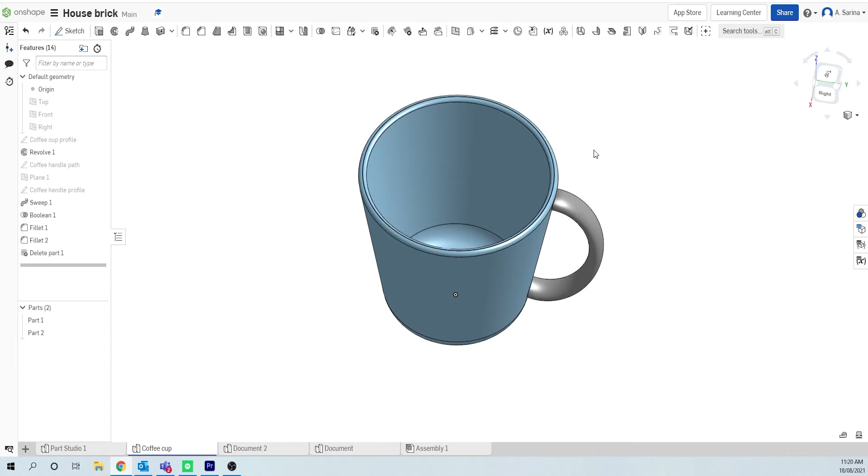The second way is the revolve tool, which is what we use for the main body of this coffee cup, or the liquid reservoir part, where we drew a profile and then revolved it around an axis to create the shape. And then the third way is the sweep tool, which is where we drew a profile and a path for that profile to follow, and that's how we created the handle of our coffee cup.

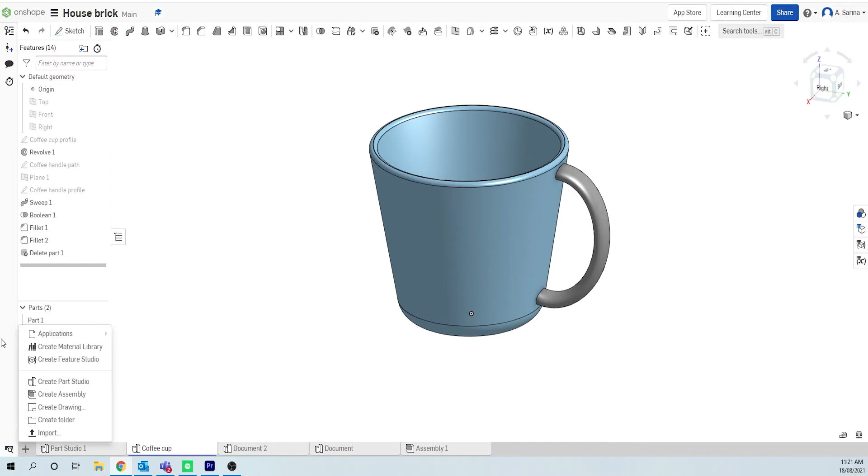So in this tutorial, I'm going to show you one more way that we can use to create 3D objects, and that's called loft. So what I want you to do is to create a new part studio, and again, to do that you just click the plus down in the bottom left corner and go create part studio. And for this one we're going to be creating a drink bottle, so you can rename it drink bottle and then click enter.

Now the loft tool works by creating a series of 2D sketches and then joining them together. So we need to create some extra planes other than the 3 starting ones, so that we can draw our profiles and then loft them together. So I'm going to select the top plane, and then I'm going to select the plane tool in the ribbon at the top here.

When I select the plane tool, it basically creates a plane offset a certain distance parallel to the plane that I've selected. So in this case we're going to offset it 40 millimeters and then click the tick, and you'll see it's created a new plane. And I'm going to repeat this a couple of times. So I'm clicking the top plane again, then the plane button. This time I'm going to offset this one 200 millimeters. And you'll see there's another plane created at the top here.

Now, there is another movement function which I haven't showed you guys yet in OnShape. If you click the mouse wheel and hold it, you can pan around the workspace. So remember, scroll wheel zooms in and out. The right click and hold lets you rotate around in 3-dimensional space, and then clicking in the mouse wheel and moving lets you pan.

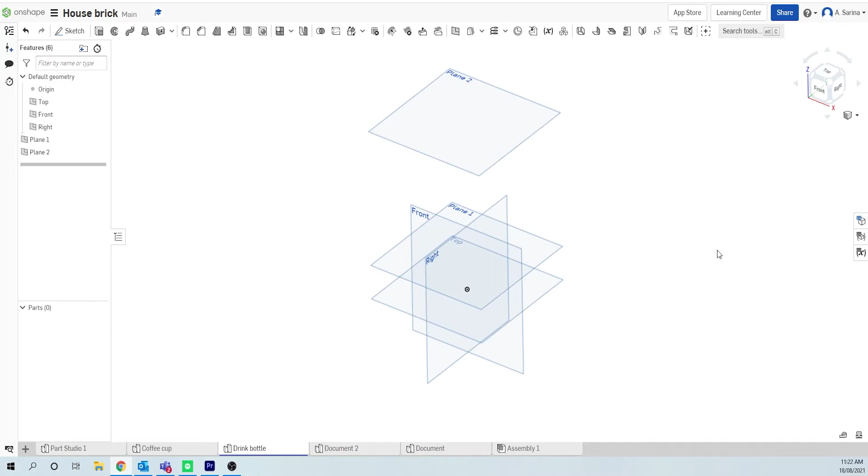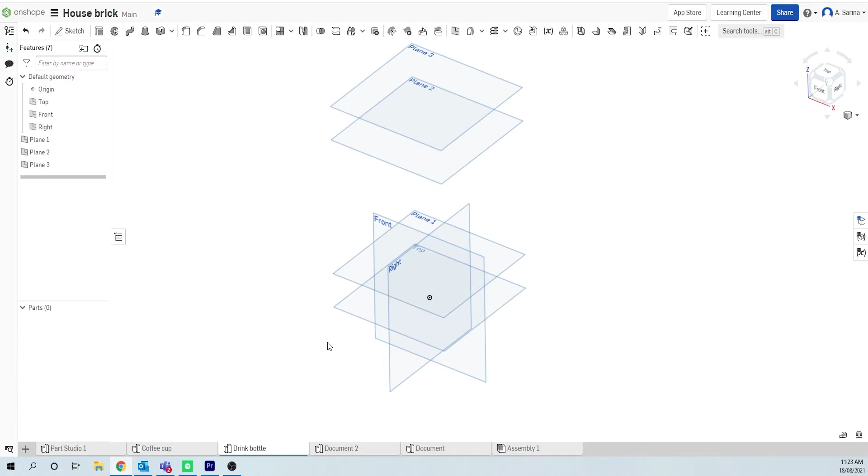Okay, we need to create one more plane, so I'm going to select the top plane again, and then I'm going to click the plane tool again, and this one we're going to offset 240 millimeters and click the tick. Alright, so what we're going to do is we're going to create a hexagonal drink bottle that's lofted together. And to do that we're going to start on this top plane, click N to normalize, and then create a new sketch as we have been.

This time, instead of doing rectangle or circle, we're going to use the polygon tool. So I'm going to start my polygon on the origin point, drag my cursor out horizontally, making sure that my line is dotted yellow, and then I'm going to click. Once I click, it's going to let me change how many sides my polygon has. So if I move it to the left, I get 3, and if I go to the right, it increases the amount of sides. We're going for a hexagon, so we're going to go with 6 sides and then click.

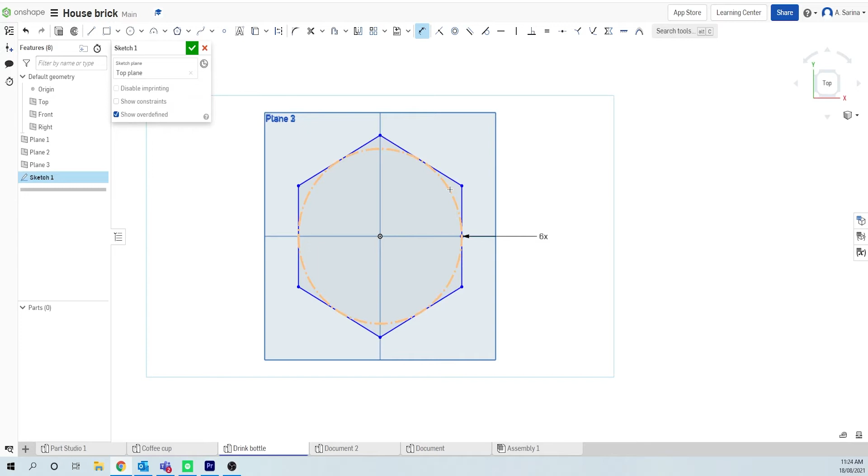If you have got the wrong amount of sides at the end, you can just double click on this and change it to however many sides you want. The next thing we need to do is dimension our hexagon. So to do that, you can either click the dimension tool here or press D on your keyboard. Click on the inner circle of the polygon and drag out the dimension. In this case, we're going to make our hexagon an 80 millimeter hexagon, and then we're going to finish that sketch. We're not going to worry too much about naming sketches in this instance because we're going to loft them all together anyway.

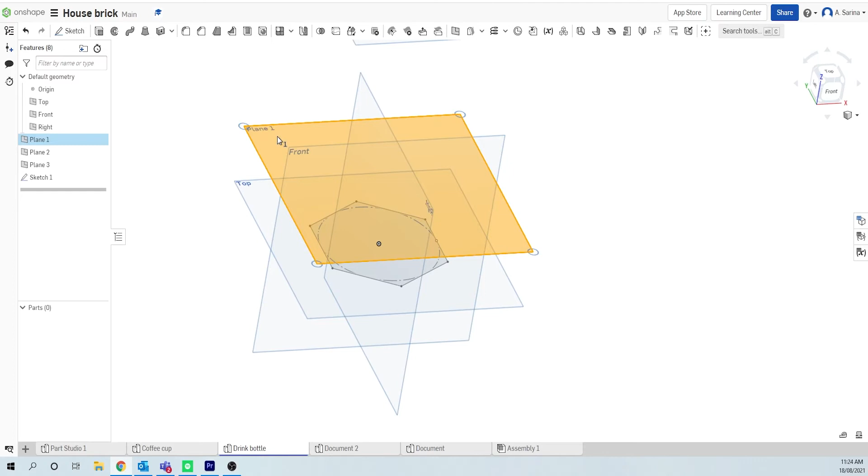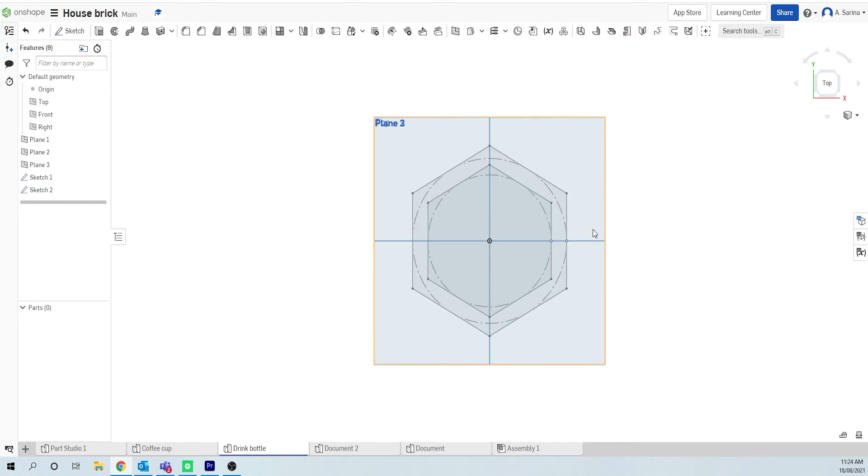Alright, moving back into the 3D space, I'm going to select the next plane, N to normalize, and start a new sketch. And again, I'm going to create another hexagon. This one I'm going to make slightly larger, so I'll drag it out horizontally again, click, make sure we've got 6 sides, then select the dimension tool and change the dimension of our hexagon to 100 millimeters and finish the sketch. And we're going to repeat this process again. So I'm going to go to the next plane, N to normalize, and then sketch.

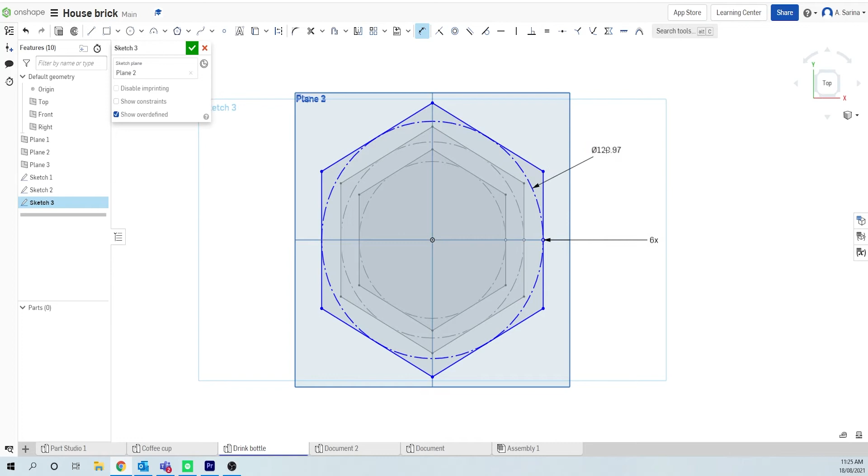I'm going to create a hexagon again, so clicking on the origin point, and this one's going to be the same size as the last one, so I'll drag it out, click again to make sure there's 6 sides, dimension tool, drag the dimension tool out, and then change that to 100.

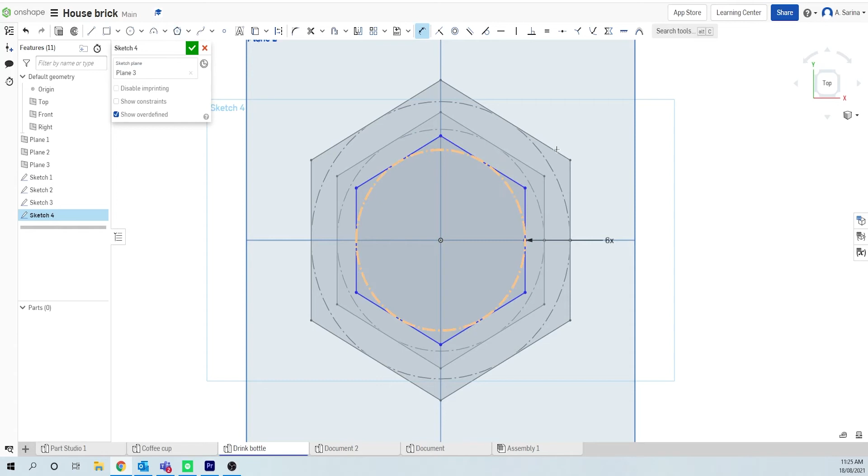And then the last one we're going to do is on the top plane that we created, plane 3, N to normalize, and this one is going to be another hexagon that's the same size as your original one. So start on the origin point, drag out horizontally 6 sides, and dimension it to be 80 millimeters. Great, now we've got everything we need to do a loft.

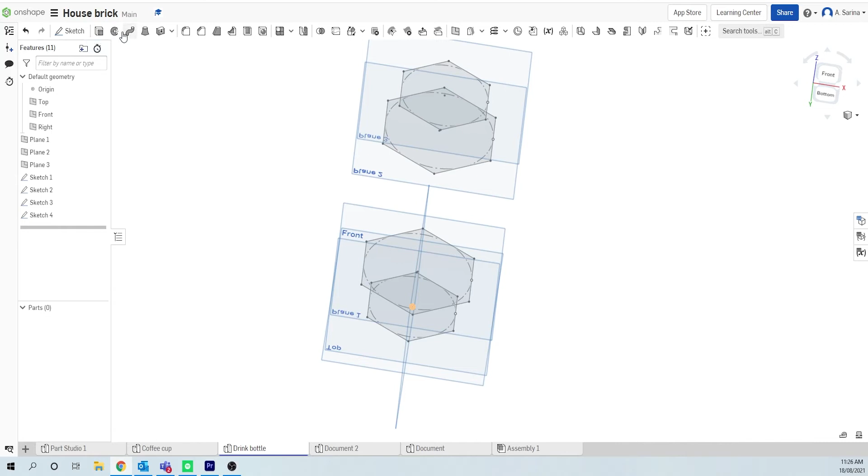So what I'm going to do is rotate back around into 3-dimensional space so I can see what I'm doing a little bit better. And with larger objects like this is when that pan tool really comes in useful, because you can zoom out and then use the mouse wheel click and hold to move the object into a more favorable position. Now with the loft, we're going to go up here to our 3D tools. So we've got extrude, revolve, sweep, and loft.

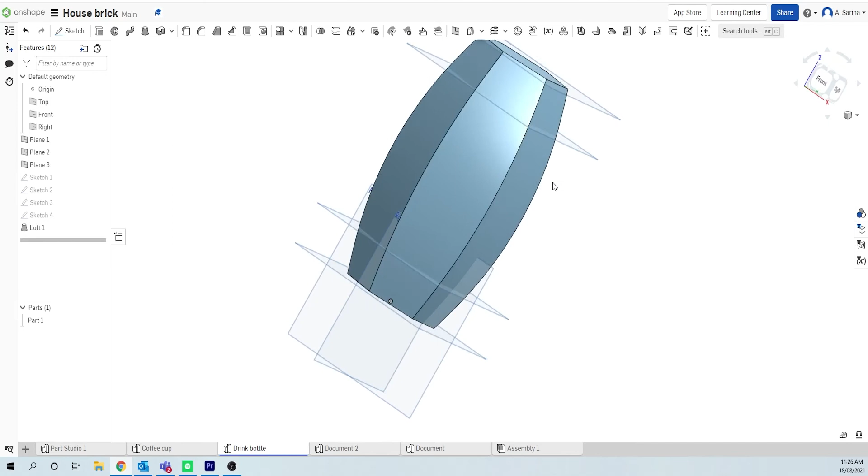With loft, basically we want to select the profiles in the order that we want to join them. So I'm going to start at the bottom, click the first profile, then the next one, then this one, and then this one, and then that's it. We're just going to click tick, and it's going to create our 3D object for us. And you can see what it does is it basically joins those profiles and blends them all together so that we have a nice shape. And this is going to form basically the bottom of our water bottle, or the water reservoir part of it.

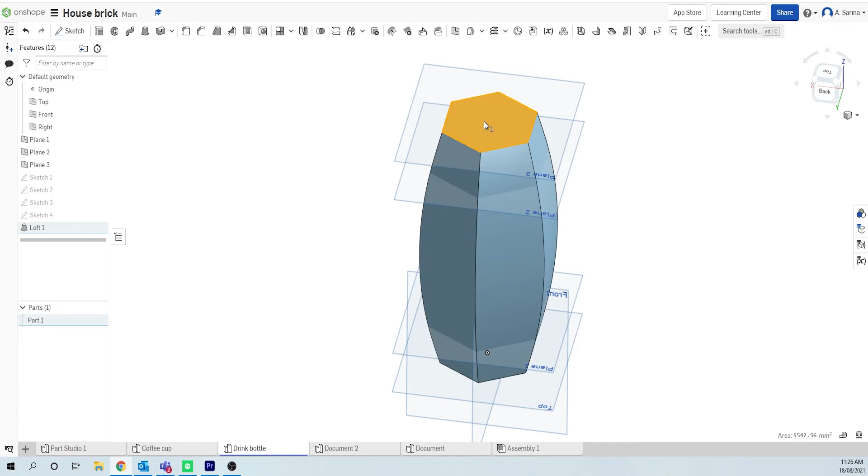Okay, the next thing we're going to do is we're going to create a circular top on our water bottle for a lid, and also the place that we're going to drink out of, and then we'll hollow the water bottle out. So we're going to click on this top face of the water bottle, press N to normalize it, and then we're going to draw a new sketch. We're going to use the circle tool, starting from the origin point, drag your circle out, and we're going to create a 70 millimeter circle.

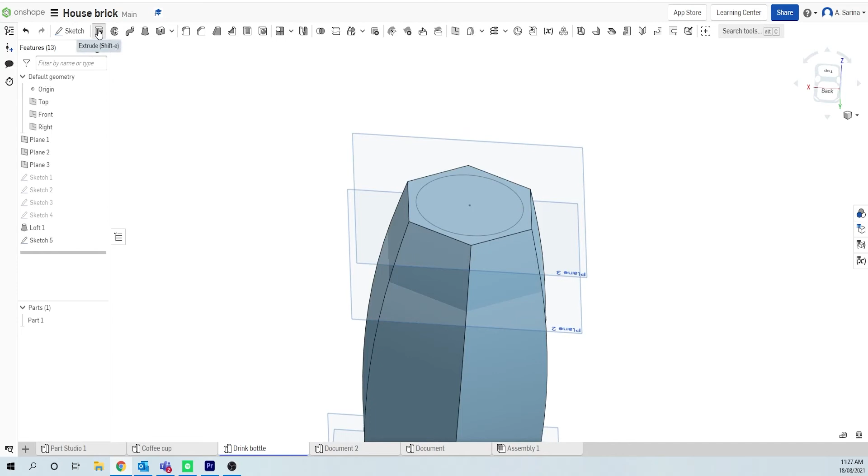Press enter. I'll finish that sketch, rotate into 3 dimensions. I'm going to go back up to the extrude tool, and then I'm going to extrude that circle out. In this case, I'm going to extrude at 20 millimeters. Make sure we're adding, so that means we're adding material to the base, and this will stay as one part. And then we're going to click the tick.

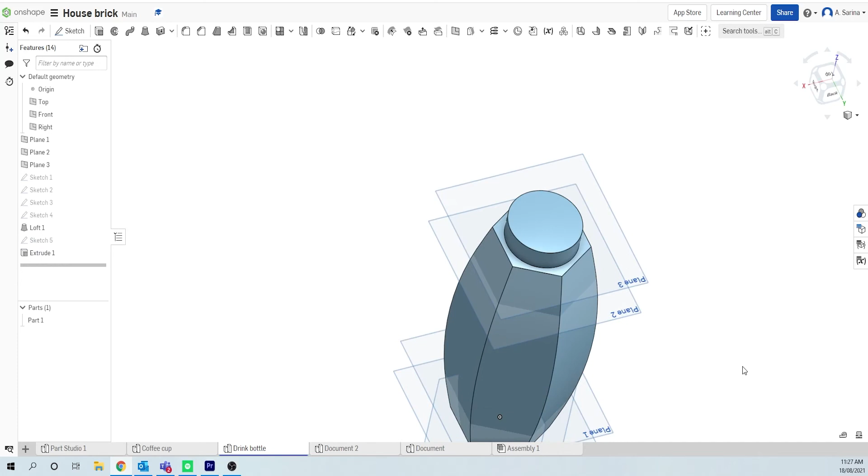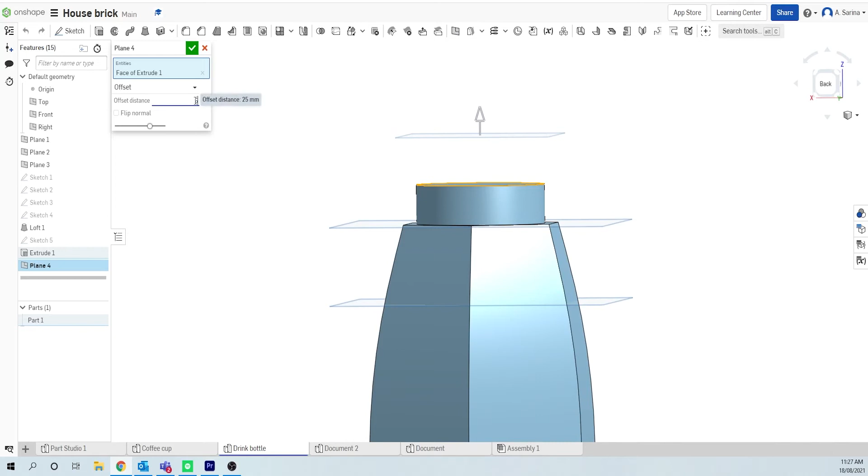Okay, and that's basically our water bottle created. The only thing we're going to do is hollow that out, and we'll do that in a minute. What we're going to do before we hollow it out is create a lid for it. And so to do that, I'm going to create one more plane. I'm going to click on this top surface here, and then click our plane tool, and we're going to create a plane above that surface 5 millimeters. So I'm going to type 5 in here, and then click tick.

Again, I'm just going to highlight, if you make a mistake on any of these steps and you need to go back and change it, say for example that plane you just created was too high, you can just double click on it in the feature tree. It brings the dialog box back up, and you can change it, and then click the tick again.

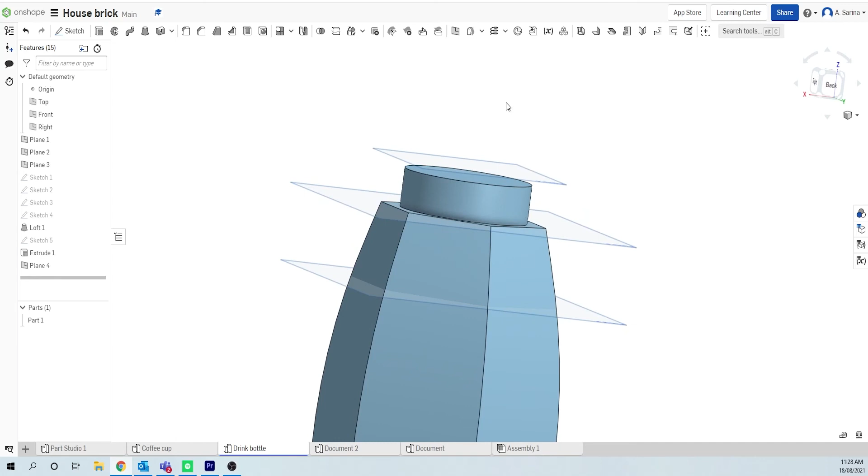Alright, so to create the lid, we're going to click on this Plane 4, press N to normalize it, and then we're going to click sketch to start a sketch. This time we're going to draw another circle. So starting in the origin point, drawing your circle out, and our circle is going to be 76 millimeters in diameter, which will mean that it's a 3 millimeter thick lid all the way around.

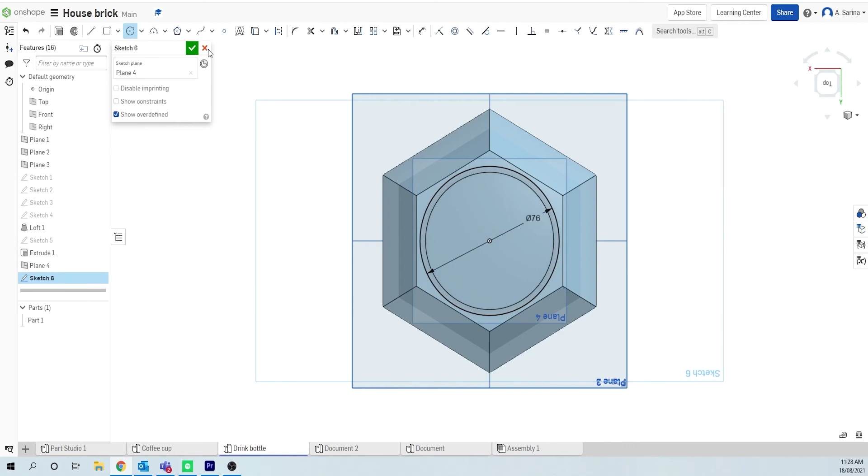We're going to finish that sketch, and then we're going to go to extrude at the top here, click our circle. Now we want to make sure we've got new, because we're going to create a new part. We want the bottle and the lid to be separate. At the moment you can see that it's extruding up. We don't want that because we want the lid to marry up to the top of our water bottle. So we need to change the direction.

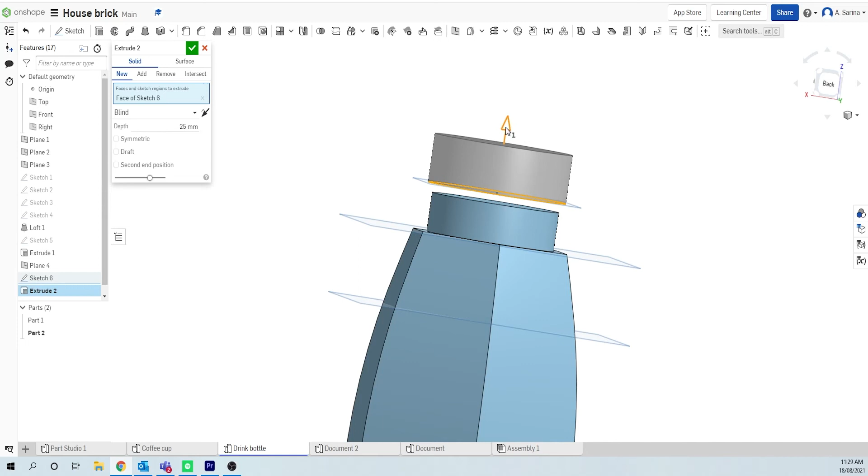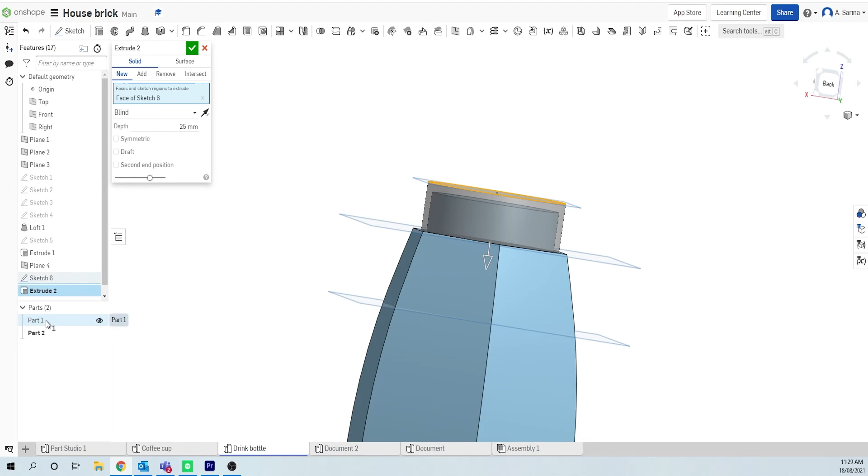Now there's 2 ways you can do that. You can click this arrow and that will change the direction, or you can click the arrow in the dialog box. The last thing we want to do is make sure that it's extruding 25 millimeters. And you'll see here when I change the direction that it clicked over to add. Make sure that's on new, so that it creates a new part, and you'll see there's a second part down in our parts menu here. And I'll click the tick to create that part.

Now what I'm going to do is just quickly rename our parts. So part 1 I'm going to rename as the body of the water bottle, and part 2 I'm going to rename as the lid.

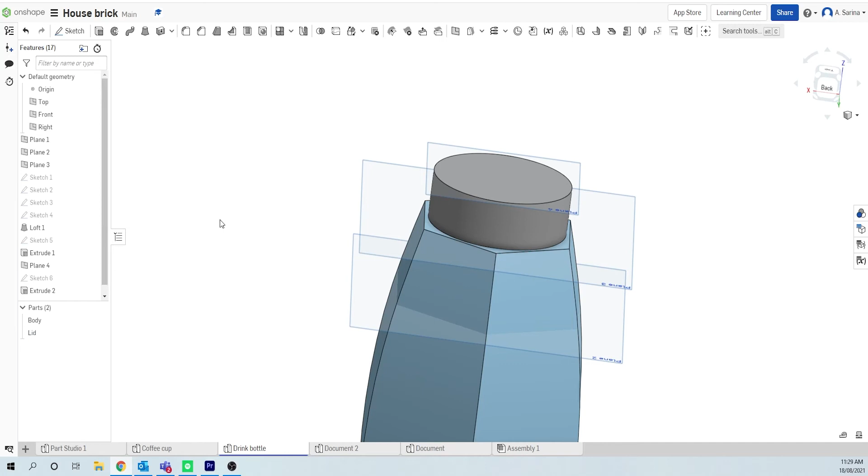Alright, really we've got 2 steps left before we're finished. We want to hollow out the lid and then hollow out the body. So the way that we're going to hollow out the lid so that it fits onto the water bottle properly is by using the Boolean tool at the top.

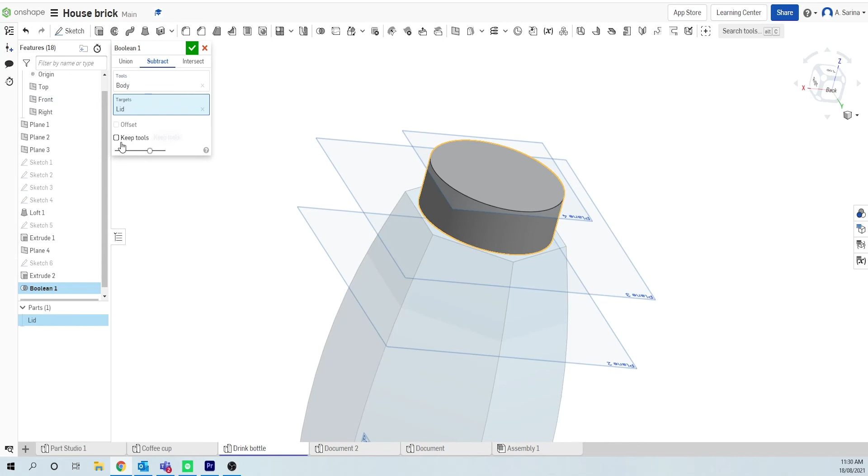So click Boolean, we're going to do a subtract. For the tools, we're going to subtract the body from the lid. So for tools we select body, for targets we select the lid. Make sure you click keep tools so that it keeps the body, and then click the tick. And now what that's done is hollowed out the lid. We can't see it at the moment, but I'll show you how we will be able to in a second.

If you made the mistake with the Boolean of not clicking keep tools, just double click it in the feature tree, and you can go back and edit it so that you can make sure you keep the base of your water bottle.

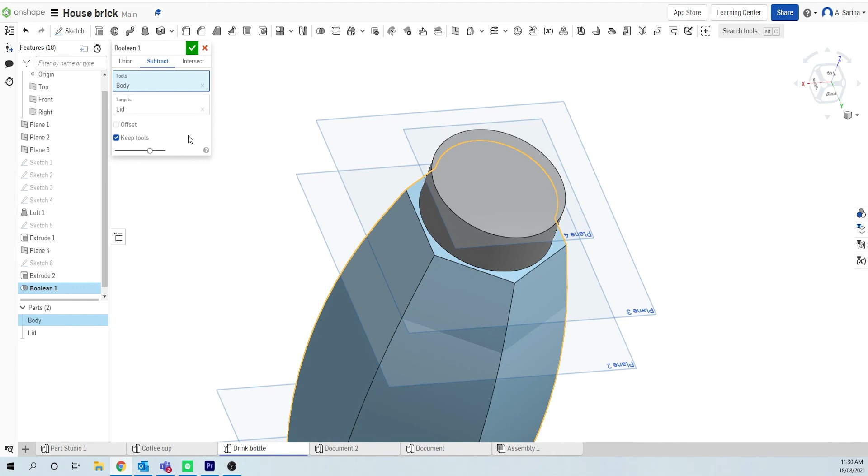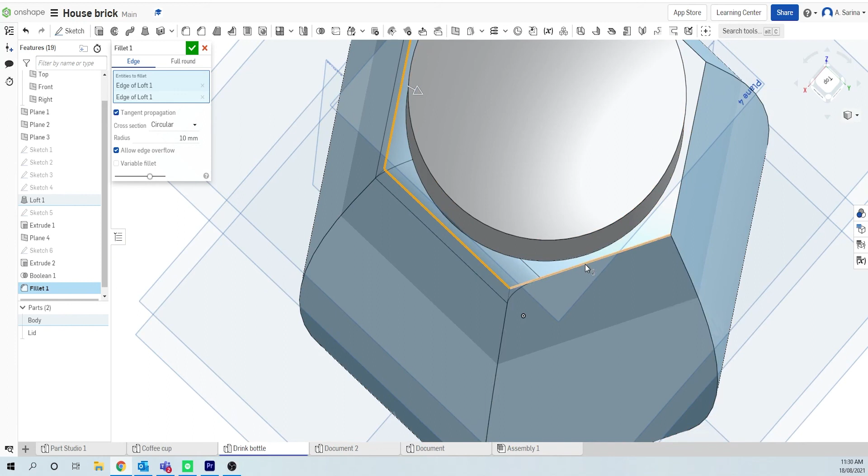Alright, the last thing we're going to do before we hollow out the water bottle is just go around and fillet some of the edges to make it look a bit neater. So the first thing I'm going to do is fillet all of these top edges, and you can go around and click them all individually, or you can just click on the face and that will fillet them all. I'm just going to go click all the exterior ones here, like so.

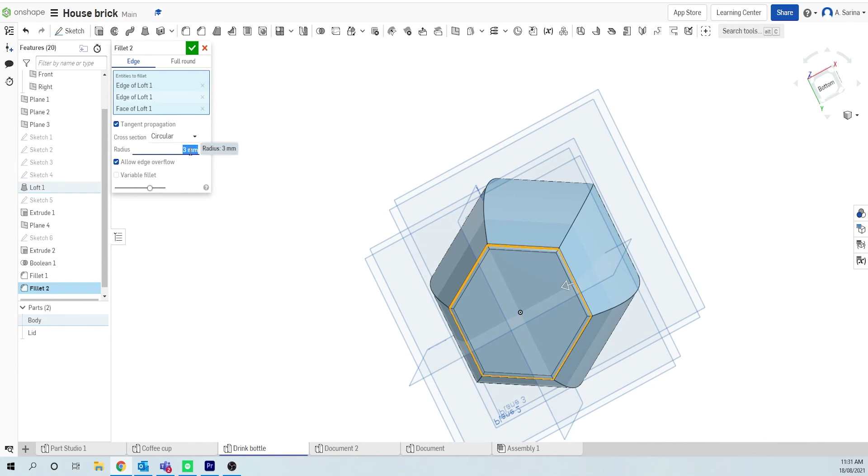And I'm going to put maybe like a 3mm fillet on them, just a small one that sort of marries up to the edge of the lid. I'll put one on the top of the lid as well, and then click tick. The last edge I want to fillet is the bottom edge, and I'm going to put a larger fillet on that just to look a bit different. So we'll just click in the center to select all of those edges. I'm going to put a 10mm fillet on it, and then click the tick.

Alright, now I'm going to show you how to hollow out the water bottle, and this again is another tool that we haven't used yet. So to do this, what we're going to do is go over to your parts menu, and next to the lid you're going to click the little eyeball symbol, and that will hide our lid. And then up in the ribbon there's a tool called shell.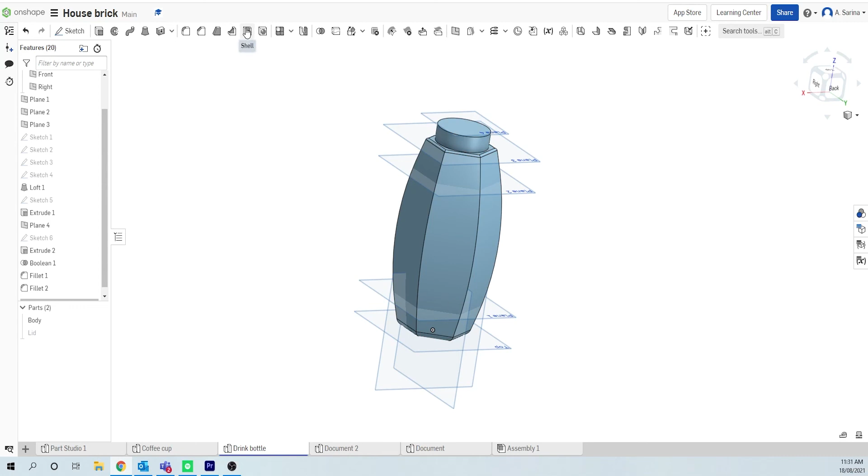We're going to click shell and then click on the top surface of our water bottle, because that's going to be the open surface. Leave the shell thickness as 2.5mm, that's fine, and then click the tick. And what you can see now is that our water bottle's been completely hollowed out.

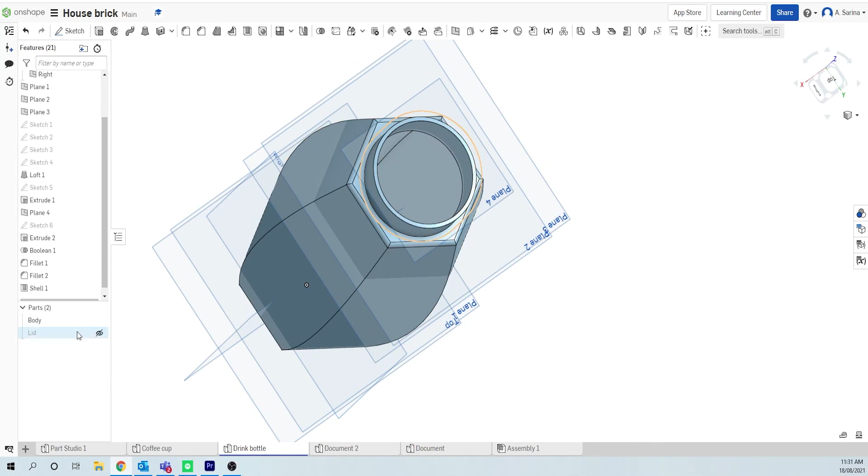Okay. Alright, what I'm going to do is show the lid again, and the last thing I'm going to do is make my water bottle transparent, just because it's nice to be able to see the liquid inside of your water bottle. So to do that, you click the body in the parts list, right click and go edit appearance. Choose a color that you want for your water bottle, so I'm just going to select green, and then there's this little slider here that changes the transparency. I'm going to drag that down to about 0.3 and then click the tick.

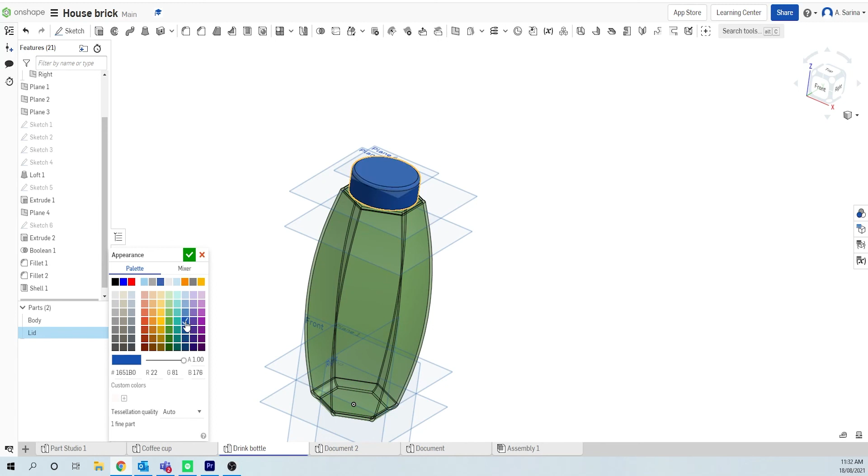And then the last thing I'm going to do is change the color of my lid. So I right click on the lid and go edit appearance, and I might just make the lid like a bluey color. We'll go with that and click the tick. And that's pretty much it done.

If you want to look at your object without having all of the planes, because they don't look particularly great, press P on your keyboard and that will hide them all, and then you can look at your object in all of its glory.

So just to quickly recap everything that we've done so far, we now know 4 ways to make 3-dimensional objects. So the first way is an extrude, where we start with a 2-dimensional shape and push it out to be a 3-dimensional shape. The second way is a revolve, where we start with a profile and then revolve that around an axis to create a shape, like we did with the coffee cup body.

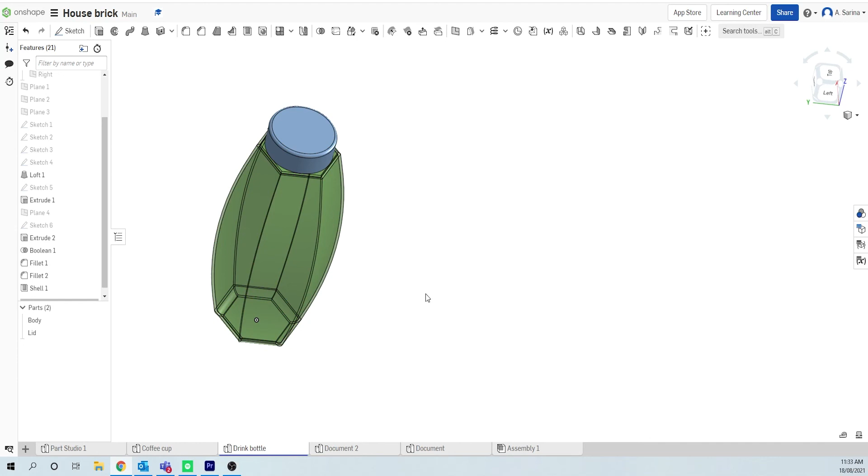The third one is a sweep, where we start with a profile and then sweep it along a path, like we did for the coffee cup handle. And then the last one is a loft, where we take a bunch of profiles and join them together. And that's pretty much it for this tutorial.